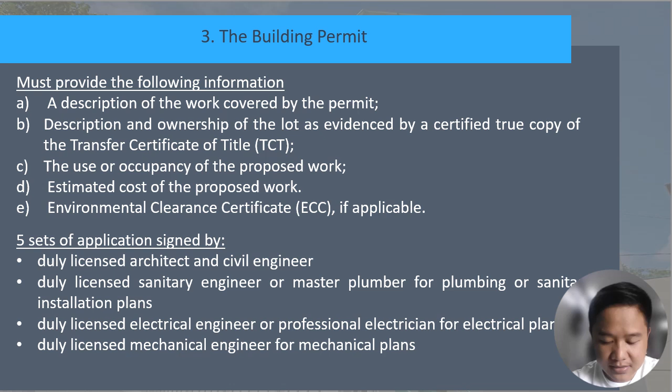So the required engineering documents include structural design and seismic analysis, boring and plate load test in the case of a building or structure of 4-story or higher.

And we have approved standard requirements: the zoning and land use, lines and grades, structural design, sanitation and sewerage, environmental health, electrical and mechanical safety, as well as other rules and regulations promulgated in accordance with the provisions of the National Building Code of the Philippines.

No payment of fees is required in the application of the building permit for school buildings. The building official normally issues the permit within 15 days of filing.

The work shall be done strictly in accordance with the approved plans and specifications. Any change, modification, or alteration may be done only upon the approval of the building official. The building permit expires and becomes null and void if the work is unauthorized.

If the work so authorized is not commenced within 1 year of the approval of the permit, the permit expires if the project is not started within a year. Or if the work is suspended or abandoned at any time after it has been commenced for a period of 120 days.

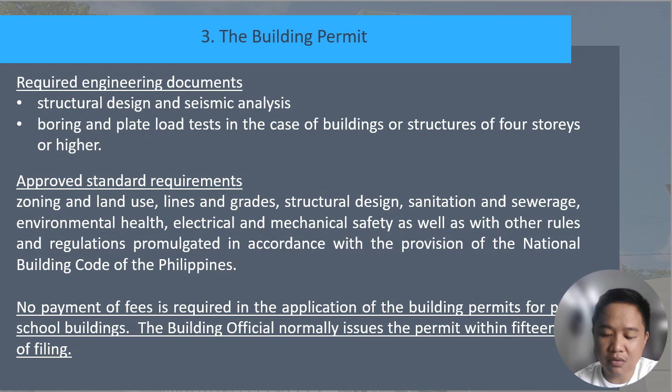Next is the mode of procurement. The construction of school buildings is a form of procurement of infrastructure projects and shall be governed by Republic Act 9184, otherwise known as the Government Procurement Reform Act. It provides implementing rules and regulations, applicable guidelines, and other issuances of government procurement policies.

As a general rule, procurement of school buildings shall be done through competitive bidding. The only exception is negotiated procurement. The Government Procurement Policy Board has issued a manual of procedures for the procurement of infrastructure projects as reference guides for procuring entities in their procurement operations, effective January 2007.

In case of construction of school buildings under projects funded by an International Financing Institution, such as the International Bank for Reconstruction and Development, or IBRD-funded Principal Lead School Building Program, the procurement methods and guidelines of the concerned financing institution shall primarily govern.

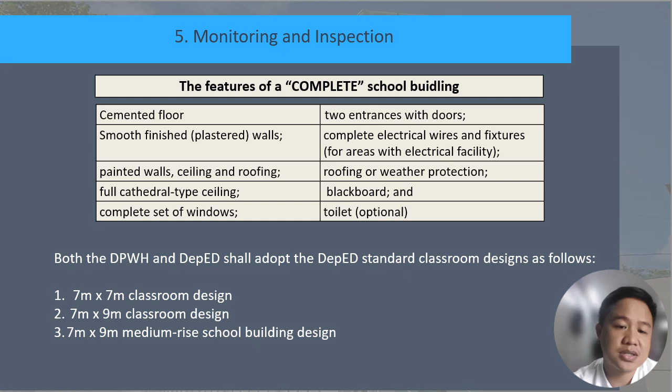The features of a complete school building are also followed. There should be a cement floor, smooth finished plastered walls, painted walls, ceiling and roofing, a complete set of windows, two entrances with doors, complete electrical wires and fixtures for areas with electrical facilities, roofing or weather protection, blackboard, and toilet, which is optional. Both DPWH and the Department of Education shall adopt the DepEd standard classroom design, such as the 7 by 7 meter classroom design, and the 7 by 9 medium-rise school building design.

Now we have acceptance and non-acceptance of the school building. After the warranty period, a post-technical inspection shall be done by the inspectorate team, composed of the division's physical facilities coordinator, a representative from the implementing unit, the school principal or head, the shop teacher, and the PTA, the parent-teacher association representative, as observer. A certificate of acceptance or non-acceptance shall be used for this purpose.

Next, we have the school building card. Each individual school building structure, whether permanent or semi-permanent, shall have a school building card. This form shall be used to fast-track the effective recording and ready reference of the school building.

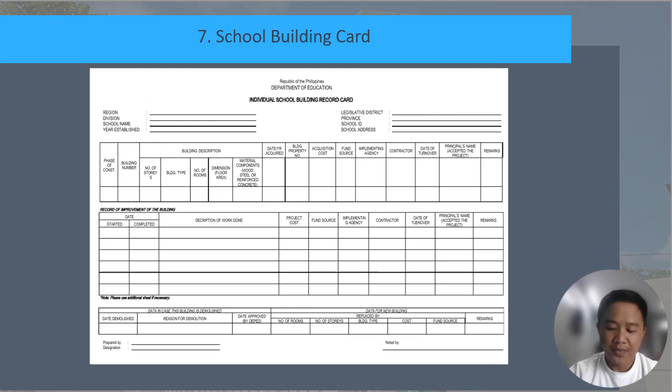All school heads, through the assistance of the school property custodian and/or the school physical facility coordinator, shall ensure that all buildings, pavilions, stages, and similar structures, existing and future construction in school, shall each be provided with an individual school building card. A school personnel shall prepare 3 copies for each school building structure and shall keep updating the entries from time to time.

The distribution of the 3 cards shall be as follows: the first copy shall be retained by the principal, the second copy for the division physical facilities coordinator, and the third copy for the division supply officer.

Now, improvement and maintenance of school buildings. School building improvement and maintenance are essential aspects of school plant management and require constant attention and careful planning by administrators. The school head shall undertake the maintenance and minor repair of the school building using available funds sub-allotted by the Department of Public Works and Highways, based on the program of work prepared by and approved by the district or city engineering office and concurred by the school head.

We have repair, which is a remedial work done on any damage. It could be a minor repair or a major repair. Minor repair is just the replacement of school building components which are not subjected to critical structural load and stresses, and which are estimated to cost less than 10% of the cost of a standard unit, such as repair of windows, doors, partitions, and the like.

Major repair is the replacement of school building components which are subjected to critical structural load and stress, and are estimated to cost 10% or more of the cost of a standard building unit, such as repair of roof frames and exterior wall posts. Major repair materially increases the value, extends the use, and life of the building. Then we have rehabilitation, which is intended to put back the original or previous condition of the building.

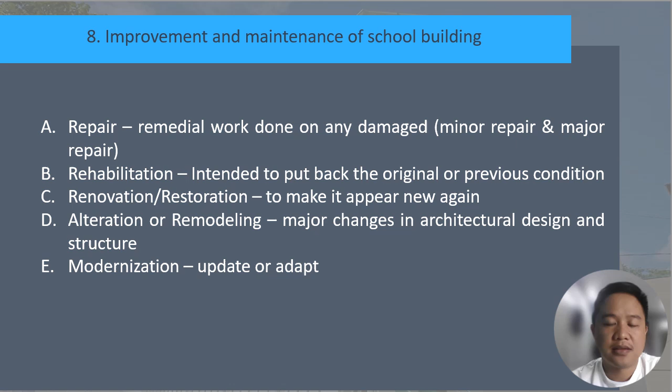We also have condemnation and demolition of a school building. As a matter of policy of demolition, in order to clarify procedures on the condemnation and demolition of school buildings which are perceived to be hazardous, DepEd Order number 48 series of 2000 was issued to contain supplemental guidelines. As a matter of policy, demolition shall be resorted to only when a physical structure is beyond reasonable repair, poses danger to the safety of school children, and the school administration can assure continuity of school operation even when the structure is demolished.

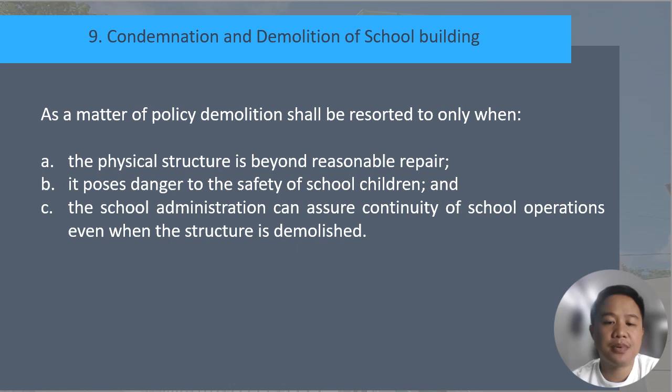Then we have the revised guidelines. So the school head, through the school division superintendent, requests for an ocular inspection. Before condemning the building, the superintendent will request an ocular inspection of the area to see if it can be condemned. Then the building official conducts the inspection. The school head requests from the school division superintendent authority to demolish the condemned building.

Request to the central office for further evaluation. Then the regional office evaluates the request and conducts inspection again. The school head applies for a demolition permit from the building officials, and informs the Office of the Commission on Audit, the resident auditor, and requests clearance if it can be demolished.

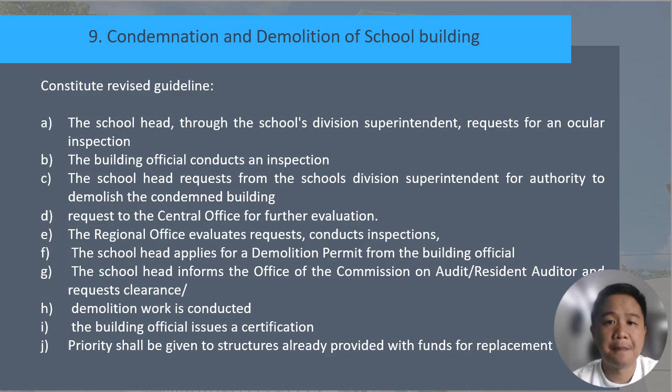Demolition work is then conducted. The building official issues a certification, a certificate of demolition, and priority shall be given to structures already provided with funds for replacement. So it doesn't mean that once it's demolished, it's immediately replaced—the fund has to be prioritized first, so they have to request for another new building.

Then we have the types of school buildings for special cases. We have the ISO panel or DuraQuick system, the modular type school building or PGMA school building, the modified design of school building by the engineering brigade, the Millennium School Building Design, and the NGO constructed school building.

The technology can be used for mobile classrooms needed during emergency situations. It can serve as an alternate to the conventional design at low cost. The favorable acceptance of this new technology is a testament to its efficiency, aesthetic value, and reasonable cost factors, which is critical in any major investment such as buildings and facilities.

In line with President Arroyo's thrust of improving the standard of education, the Department of Public Works and Highways has adopted a new construction technology utilizing this ISO panel prefabricated material to immediately address the shortage of 44,000 classrooms in the country, since it's easier to construct because it's already prefabricated.

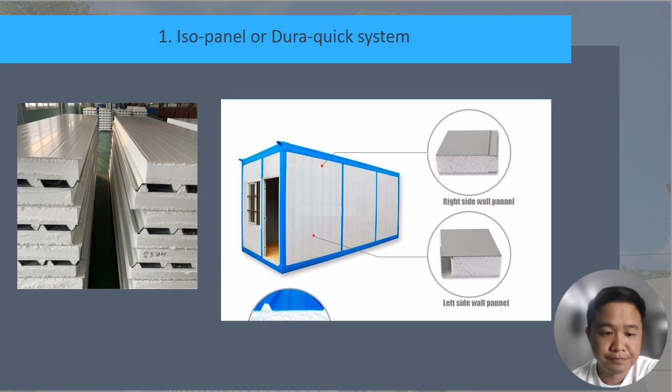The material used in this technology meets the following requirements: the structure shall be all-weather type and can withstand gale force wind up to 220 km per hour, or a signal number 4 typhoon, and an earthquake magnitude of 8.5 on the Richter scale. So it's sturdy even though it's prefabricated—it can withstand at least a signal number 4 typhoon and an 8.5 magnitude earthquake.

Then it can be built completely in 10 to 12 days, much faster. It's fully insulated against heat and sound, so it's not hot and it's soundproof, so noise won't be heard outside. It's also fully sealed against rainwater intrusion during typhoons, lightweight, and can be carried and installed manually without the use of a crane.

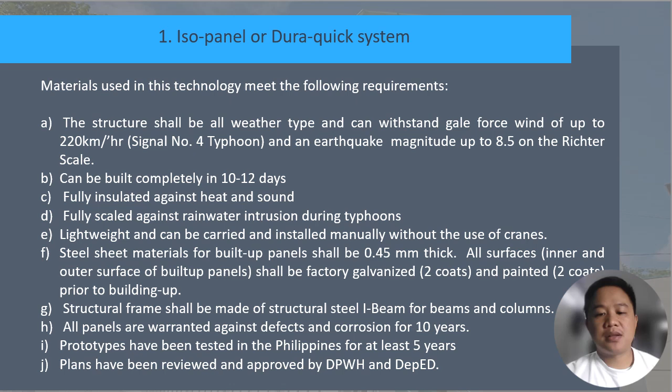Steel sheet materials for built-up panels shall be 0.45 mm thick. All inner and outer surfaces of built-up panels shall be factory galvanized and painted 2 coats prior to building, so it's already pre-painted. The structural frame shall be made of structural steel, I-beams, and columns. All panels are warranted against defect and corrosion for 10 years. Prototypes have been tested in the Philippines for at least 5 years, and plans have been reviewed and approved by the DPWH and the DepEd.

Next is the modular type of school building, or the PGMA school building. It is fast and easy to construct, with well-ventilated and appropriately insulated classroom, lower building cost, and classroom dimension of 8 by 8, so it's more spacious in terms of this PGMA school building.

School children are vulnerable to acts of terrorism, for example the case of pupils taken hostage in the Netherlands several years ago. Terrorist incidents in their nature and occurrence are so unpredictable that no general precaution on the part of the department and other government authorities can be recommended.

In areas with insurgency or peace and order problems, construction of school buildings is undertaken by the engineering brigade or the Armed Forces of the Philippines. This is to ensure the safety of the engineer, architect, and constructor, and the specialized nature of this type of work shall be handled by the military. So that's the modified design of school building.

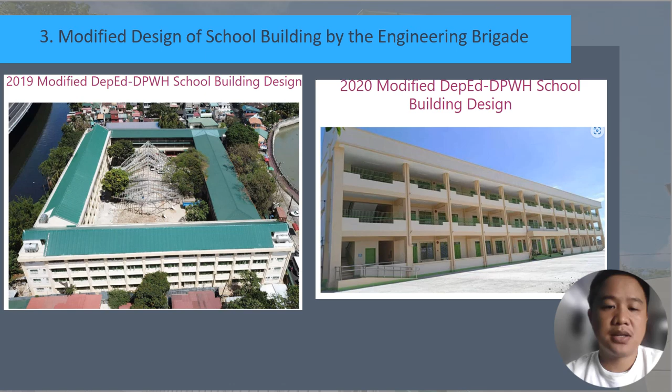In construction of school buildings in barangays, the engineering brigade has designed 7 types of school building, ranging from the use of wood materials in areas with abundance of wood, elevated structures for flood areas, and a combination of steel and iron, concrete, or masonry works. These are the examples of the modified DepEd design school building.

Then we have the Millennium school building. This is the first full bamboo school in the Philippines, built in Camarines Sur. The Office of Civil Defense, in cooperation with the Department of Education, by Shelter Foundation, Department of Public Works and Highways, Habitat for Humanity, and the United Architects of the Philippines, came up with the Millennium Design as a result of a school building design competition all over the world.

The winning design is made of bamboo, while the second prize made use of plastic bags, and the third prize was of the concrete conventional type. The design competition served as a means of exchange and ensured the widest dissemination of new technology in the area of learning environment, sustainable, disaster resilient, and cost-effective building design.

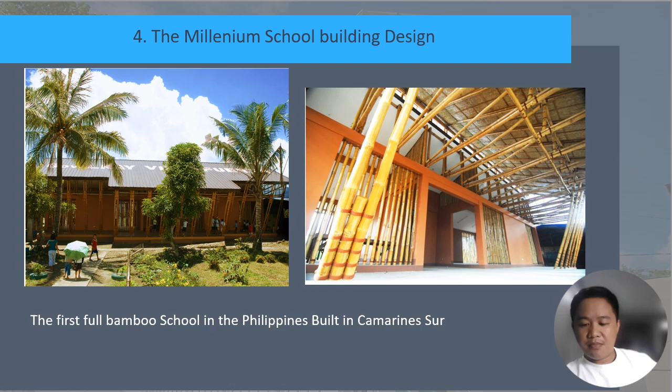Based on that, they already adopted it and made this full bamboo school in the Philippines. The Department of Education, through the ABS-CBN Foundation, will construct a prototype of the winning entries, and at the same time make a study of the technologies used in each design and adapt the design that will be hazard resilient. So it's still under investigation, a study for 3 years, to see if this type of building is still sustainable.

Then we have the NGO constructed school building. The construction of school buildings was also made available to non-government organizations which have the capacity and proven track record in the construction of school buildings. One of these is the Federation of Filipino-Chinese Chamber of Commerce and Industry, as will be discussed later.

There are types of designs. Under the operation of various school programs, they constructed a 7-meter by 7-meter classroom design at a much lower cost for classroom through the bayanihan system. Materials like sand and gravel are obtained through donations from members and from the LGU counterpart.

The FFCCCII builds classrooms in lowland and accessible sites in areas where there are local chapters. Also, there are banks and commerce entities who donate classrooms to the Department of Education.

So in conclusion, the design and structure of the school building are vital to creating an effective learning environment that supports the educational needs of students. As we explored in this unit, schools must be safe, hygienic, and adequately equipped to foster a love of learning. Understanding the various types of school buildings and the minimum standards for instructional and administrative spaces is essential for ensuring that all educational institutions meet the needs of their learners.